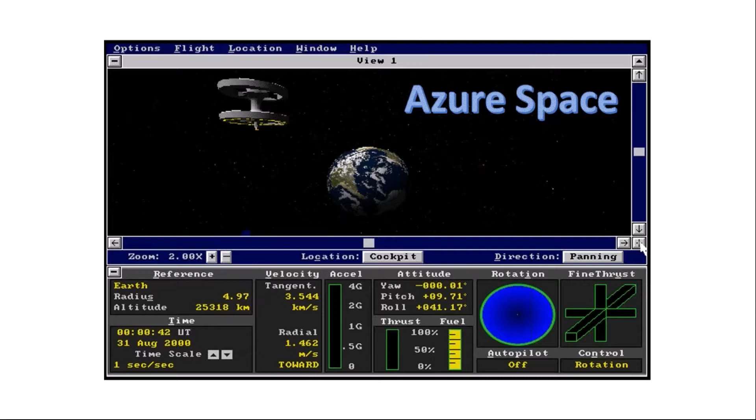We have people who are all pioneers, great billionaires, and they all invested in this industry. In fact, Microsoft has plans to launch more satellites - they already have Azure in space. Jeff Bezos was very vibrant yesterday when he came back in the capsule, and Azure Space is an example here - it's just an extension of your operating system, Microsoft, even available in space. Age is not a restriction if you have the youthfulness, whether it is 18 years on the left extreme or 82 years next to him or Jeff. It is the excitement of participating in the industry that is a dream from childhood - there is no age restriction at all.

So I now would like to use this as a few motivational things and move forward from drones to the UAV standardization in US. For a pilot certification, it is called 107 certification, and recently the Federal Aviation Administration allowed UAV even at night, and also for beyond visual line of sight testing below the G space, that is 400 feet, which doesn't require much monitoring - technically no monitoring as long as there is no untoward thing.

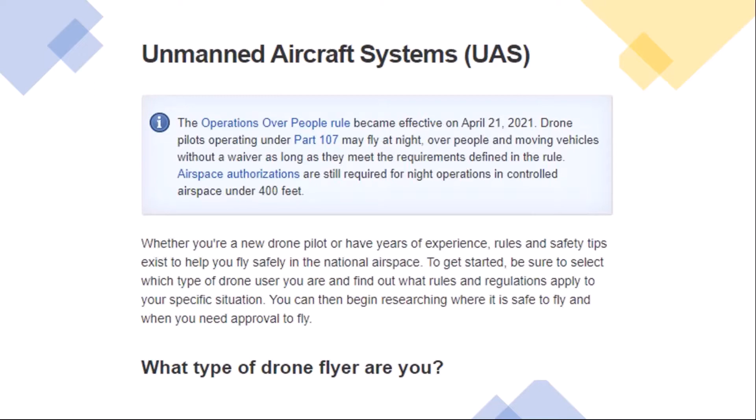These are all the things that if you are in the industry of UAV, you could, at the minimum, be in a university campus, let it be IIT Patna or Kharagpur, Kanpur or anywhere, or in public safety as a user like a government police official. You can monitor the streets or the environment, or be a certified remote pilot for a commercial operation, something like regular small planes, or for the drone for beyond visual line of sight, or a model flight, which is not a real commercial one.

Now, when it comes to UAV, it is more than your skills. It is how your device performs, that is, in the context of product testing and certification, what we are discussing today. It is the ability of your chips. Qualcomm just made an announcement that they are going strong in robotics and in the space that we are playing, because everyone is very much interested in this space, as it is very promising.

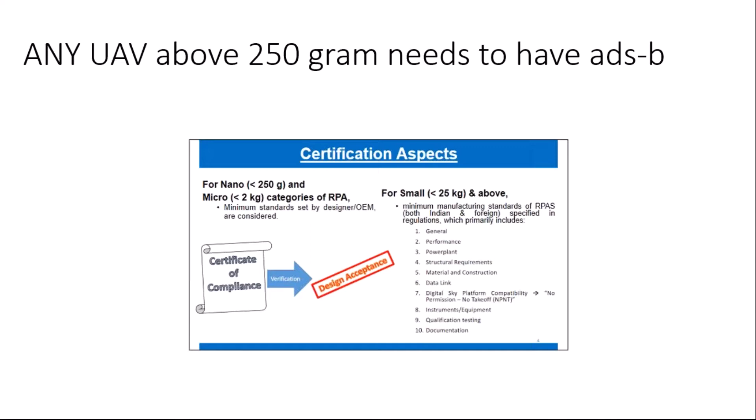Even if your drone is 250 grams, you need to be aware that you need to comply with a lot of such regulations. It's not going to be child's play. So NPNT mandate is coming. As I mentioned, there are design acceptance criteria, stage 1, 2, 3, 4, as made out in the rule book by the QCI, which I have adopted here, chapter 8, DGCA RPAS guidance manual of 2020.

So the original equipment manufacturers, be it Tata Advanced Systems or Adani's or ideaForge, which are the top 3 players in India, and of course there are Throttle Aerospace and others.

So for OEMs, original equipment manufacturers, chapter 6 and 7 rules will apply, and then documentation submission to the DGCA for verification and acceptance. Then you have to familiarize and do a demo of your product, get provisional acceptance, etc., and populate yourself in the digital sky so that you are ready to go.

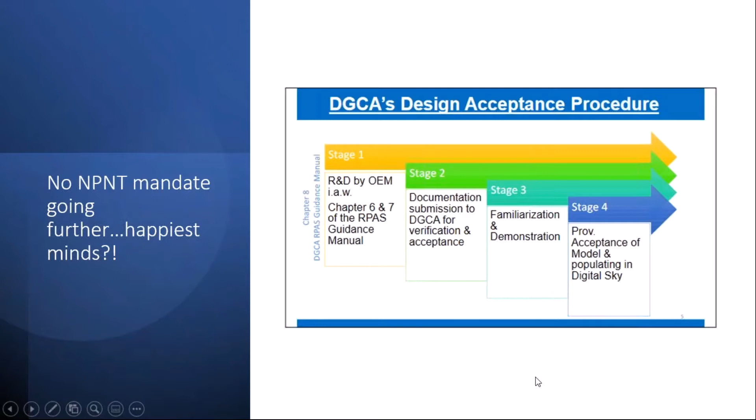That had been the case, though there would be small changes to this concept. Similarly, when this was made, QCI, about a year ago, less than a year ago, identified that there are about 19 remotely piloted aircraft system models, and most of them are quadrotors, like quadcopters.

Some are having fixed wings, some are hybrid, meaning they can perform both roles, and hexarotors, and there are other variants you could see in the visual, the small ones. So there are certain areas where, if you have investment interest, you can certainly play a role. For example, nobody has apparently come forward with their large variant. It doesn't mean they are not working on it.

And all the companies which have stakes in the aviation industry, right from Boeing, Airbus, they all have this. In fact, BMW has made a flying car demonstration. And it would not be science fiction if your car will tell you, take me to the nearest playground and I will fly because the road is congested.

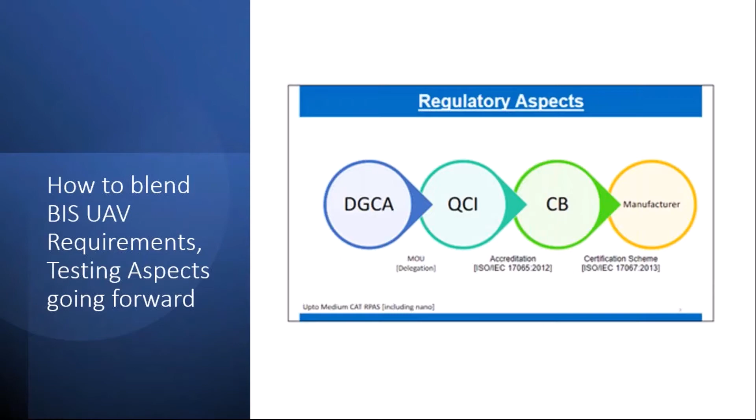Now, basically, what we learned during our journey in the Bureau of Indian Standards, Dr. Abhishek, who would speak soon after me, is also one of our contributors. And the thing is that to mentor the manufacturers is not so easy because they are already matured, and what they expect is a minimum viable order quantity, like how DJI of China luckily got a few millions at once from government to underwrite their cost, but that scenario is not there here.

So it's not like academic. A lot of hand holding is required for the BIS and other specifications to sink into their minds, to get to the level of perfection required for a global market.

So basically, the existing philosophy assumes that you get a certificate of compliance from the manufacturer, like a self-certificate, add it with the certificate issued by the certification body and the QCI, and go to DGCA and then register yourself in the digital sky and fly. So there would be a few qualitative changes as we expect in this scheme, and it is going to be more robust, but not to be scared, because we need to make it very safe.

As you can see, we are talking about the lives of people. Even if it doesn't carry humans, when it falls on humans, it has to not cause any accident. It should never fall on any human.

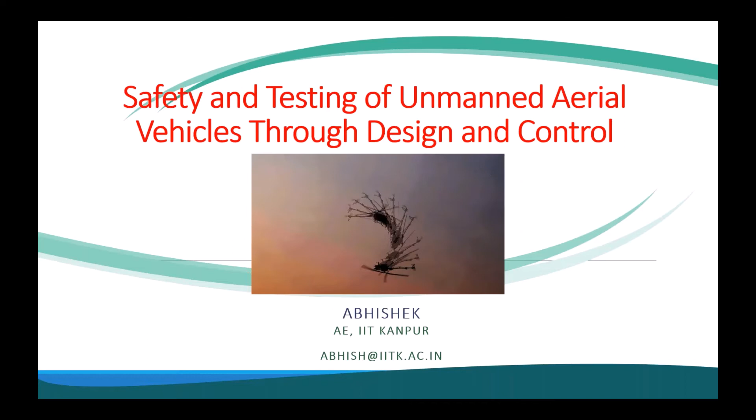Now, I'm not really an expert on standards and compliances, but as an engineer, we have been trained to understand compliances and the need for them, and to integrate them into the design process itself, so that when the design gets ready, it is already meeting some of the compliances, and the job is sort of half done already.

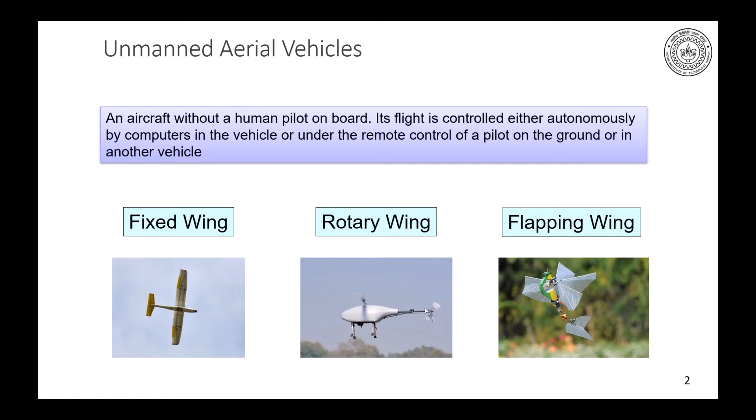So I thought I'll just put up this slide to give an overview of how different unmanned aerial vehicles look and how different they could be. Broadly speaking, from the perspective of aerospace engineering, we classify them into three categories: fixed wing, rotary wing, and flapping wing kind. Flapping wing is bird-like, which you don't see that commonly, but it is also being researched and would eventually see the light of day in the market. Other designs could be either airplane kind or helicopter kind, be it a quad rotor, multi-rotor, or whatever.

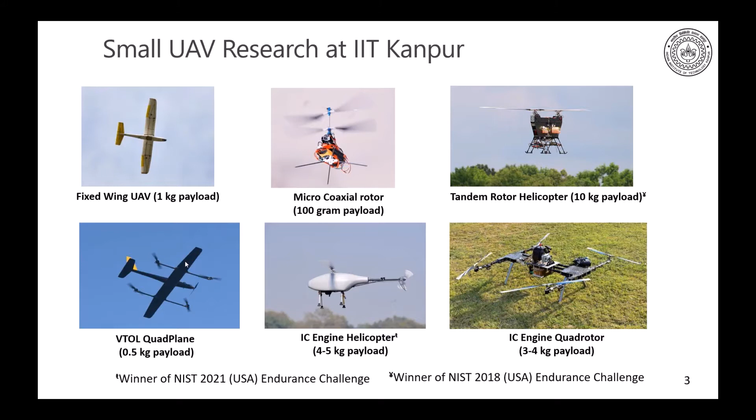To give further elaboration on how different these designs could be: fixed wing could be like a normal, simple airplane, but when you come to rotary wing design, there is a lot of variation, and a lot of hybrid designs. In rotary wing, there are designs with rotors stacked on top of each other, rotors side by side, front and back, multiple rotors, single rotor conventional helicopter design, and then wings and rotors together. This is what we call a hybrid quad plane, having a quad rotor added to an airplane.

Beyond this, there are even more unique and innovative designs coming up. Here are some pictures of unique and novel designs developed at IIT Kanpur. This is one biplane tail-sitter design, which looks like a normal drone on the ground, but it also has additional wings, and when it takes off, it actually turns by 90 degrees to become an airplane. Another variant is a swiveling biplane tail-sitter design, where you don't even require any fixed wing control surfaces, and it is purely controlled using the 4 propellers.

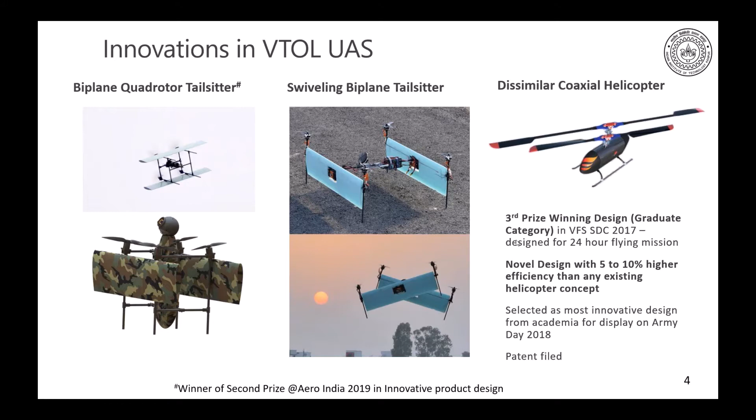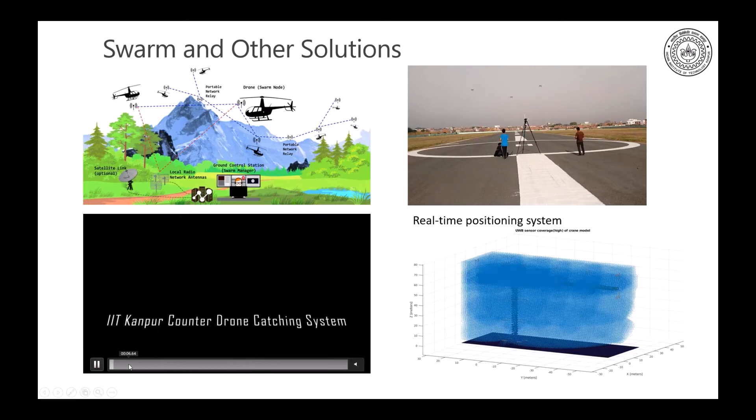And then there could be other designs also, like Kishore sir pointed out, there is already a need for counter-UAV solutions. One of the possible counter-UAV solutions is to use an unmanned vehicle to capture a rogue drone. So drones themselves may actually be part of the whole counter-UAV system. There could be another application for that.

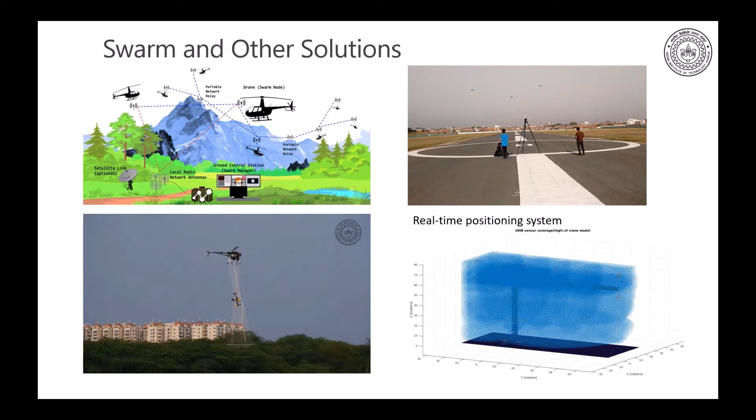And then there is a huge talk about swarm of drones. Now there is worry about the compliance of a single individual vehicle or unit of one kind, but when they start operating together in a collaborative, interactive manner, the set of requirements and compliances this kind of system would have to meet may have to be redefined, because this is a very new paradigm. These kinds of systems do not exist for conventional fixed-wing aerial vehicles. You don't see fixed-wing UAVs operating in swarms.

They may operate in a fleet, where there is human intervention, so the communication and collaboration happens at that particular level. But when it is being done autonomously, with multiple agents flying through that need to communicate, collaborate, and achieve a task together, it brings forth a completely new set of challenges.

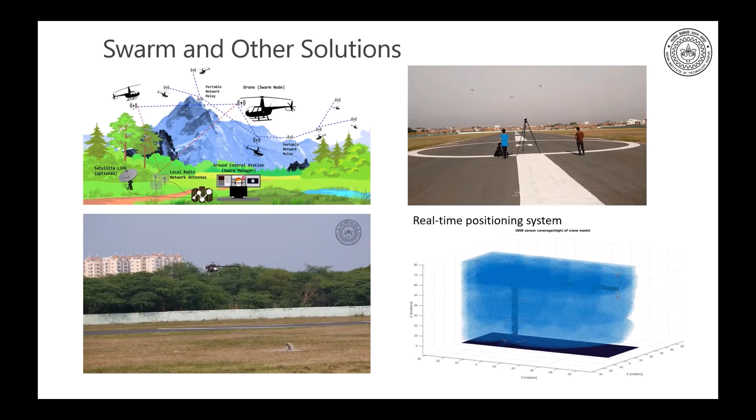So the overview is that I've already talked about some brief background. I'll talk quickly on standards and compliances, why they are needed, and how we can ensure meeting some of them and also ensure the safety of UAVs. Finally, one of the key reasons why we need compliance and standards is to ensure that my UAV operates safely during its entire operational life. So I'll talk about safety of UAVs through design and also through enhanced control.

Of course, I don't have to educate the audience about the need for standards and compliances, but nevertheless I will put it here. Special technical standards and minimum safety standards have been established and implemented for aerial vehicles to ensure their safety during entire operating life.

At the end of the day, our goal is to maximize operational availability, which one can define as 1 minus flight hours per day multiplied with mean time to repair plus administrative downtime, divided by 24 hours into mean time between failures. So our goal is to see how I can ensure that my system is available for my use round the clock.

Meeting certain compliances would allow me to reduce the mean time to repair. If I have designed my system well and it actually meets the compliances in the correct manner, it would have lesser number of failures, lesser period required for repairs, and there will be smaller downtime overall.

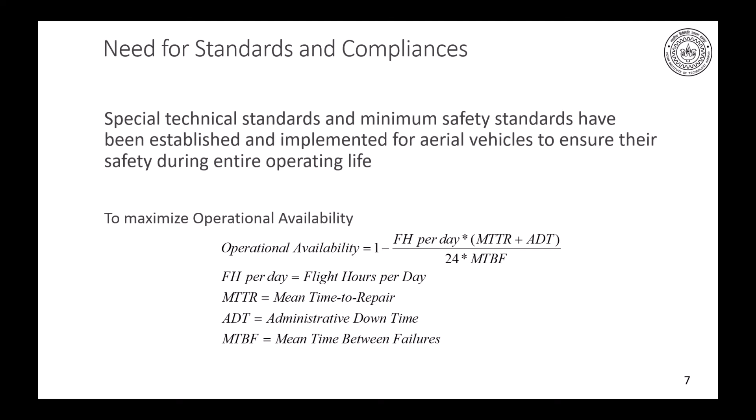Now what makes the whole problem very complicated is that a UAV is actually made up of multiple different components, so it's a system of systems. Broadly speaking, I can qualify it into 3 categories: structural systems, propulsion systems, and avionic systems. In structural systems, we have wing, rotors, propellers, the fuselage, support structure. There could be a transmission system, etc.

Propulsion system is your engines, motors, batteries, fuel, etc. And avionic system could be communication system and autonomy system, because autonomy is actually a very critical aspect for an unmanned aerial vehicle, since you don't want the vehicle to be piloted all the time. As a matter of fact, right now, beyond planning the flight plan, the human intervention required to operate most modern UAVs is minimal.

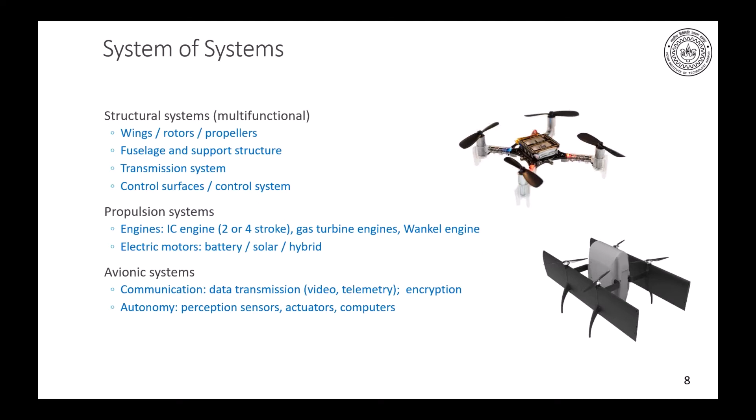So that's where perception sensors, actuators, and onboard computers become very important. And for all of these, we need to set standards for each of these components and subsystems to ensure that they are safe to operate and reliable. So setting up standards and compliances for UAVs becomes a challenging task.

So here what I've done is I borrowed information from the standards for manned airplanes, FAR 23.305. This particular standard requires meeting the fundamental strength and deformation requirements. An aerial vehicle is always focused on being as light as possible, unlike automobiles or other ground-based systems where weight may not be the biggest concern, so I can have some liberty to add additional weight. But for an aerial vehicle, weight comes at a premium.

So each and every gram of additional weight is going to compromise my performance significantly. So the requirement is to put enough material, just enough, to ensure that my structure supports the limit loads - that is the maximum loads I expect my aerial vehicle to meet in its operational lifetime, without detrimental permanent deformation. That is what we call the limit loads. And these deformations it undergoes should not interfere with safe operations. So under loads it will deform, but the deformation should not hinder my performance or operation.

The other aspect is that it should be able to support ultimate loads, that is limit loads multiplied by a factor, and this ultimate load should be supported without failure for at least 3 seconds. So this is the most absolute and fundamental requirement for manned aerial vehicles.

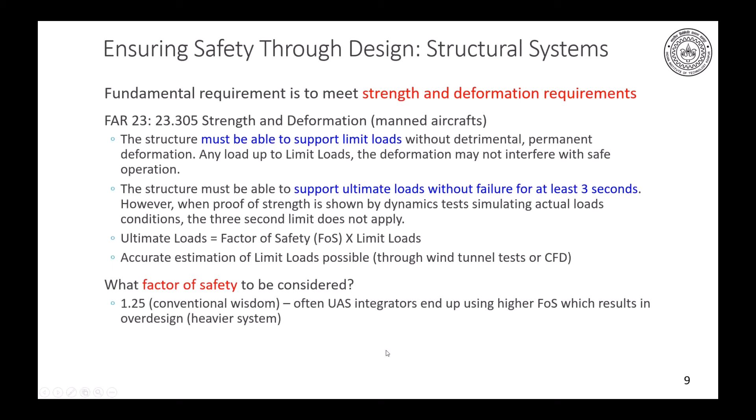Now, this design philosophy is again based on the requirements and processes followed for manned aerial vehicles. But there's no reason why we cannot follow the same for smaller scaled down aerial vehicles, which at times may look like a replica of a full scale aerial vehicle. So the two ideas which are very prominent and classical are the fail-safe approach of design and the safe life approach of design.

In safe life, I design a structure to have a minimum life. So I can design my landing gear using this approach, so that if the component fails, the whole landing gear is going to collapse. There's no redundancy built into it, and I replace my landing gear and I'm good to go.

In the fail-safe approach, what I do is design a structure which is slightly more complicated. It will have redundant support and redundant structures. So in this case, if there is a small minor failure within the structure, the remaining components would be able to take care of the extra load up to the point that the failure is detected.

So that brings forth the importance of inspection. Inspection schedules have to be defined and clearly outlined for the class of vehicle we are looking at. This becomes an integral part of the whole maintenance process, so that we can keep inspecting our platform at regular intervals and detect failure before it becomes catastrophic. This approach could be used for designing semi-monocoque wing designs or dual redundant control surfaces and so on.

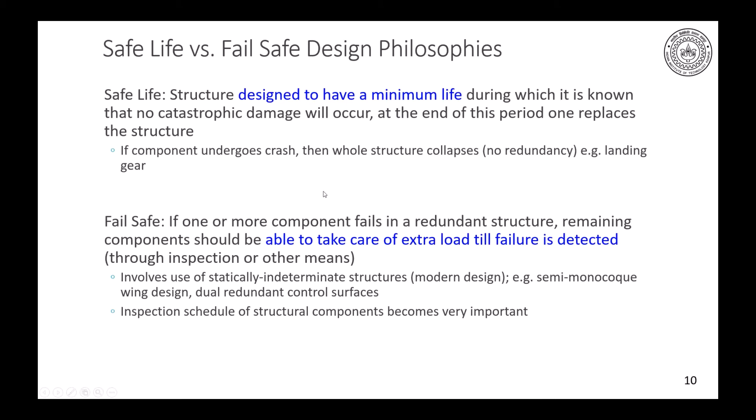So that was in terms of philosophy. Of course, one would always try to lean more towards the fail-safe design approach to ensure that my concept is safe from failure, so it is never going to fail. It has infinite life practically, but it can make the whole system expensive. So still, I would say that some components may still have to be designed using the safe life approach.

The idea is to enhance safety. So in the design process itself, we have included redundant components. That makes the whole design more reliable and safer. We have 8 pairs of them—if one fails, the other 7 may still be able to reconfigure themselves, or the controller may be able to guide them to ensure the vehicle is still controllable in a perfect manner. So that is one thing.

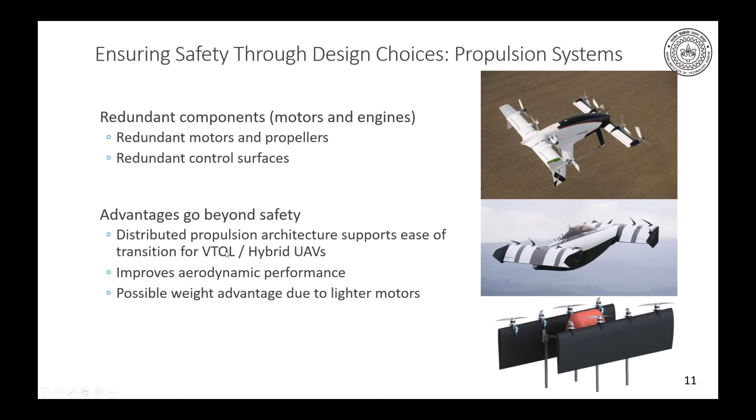We also require redundant onboard computers. Normally this was mandated for military-grade aerial vehicles, where you have duplex, triplex, or even quadruplex redundancy for onboard computers. But now, if we want to operate our UAVs in civilian areas, where it could be flying over rooftops and so on, there is a need for redundancy there too. We need to ensure that if one set of computer fails, another set can take charge of the control and ensure there is no catastrophic failure.

Actuators—the servo motors may actually have dual motors inside, so that if one motor fails, another motor takes care of the task. Redundant communication links are already getting used; this is not very hard to implement or maintain, ensuring that if one communication link fails, the other may still do the job. Nevertheless, there is always a fail-safe mode where, if the communication link fails, my UAV may return home and land. Beyond this, that's regarding the redundancy coming in on the hardware side—how I ensure my hardware is more capable with multiple layers of support.

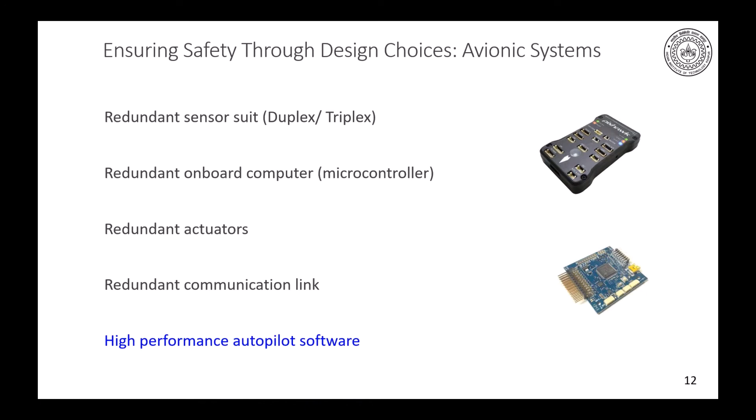But then equally critical is the software aspect, where we require high performance autopilot software, which with enhanced control algorithms can do wonders for us actually. With the same system, without any change in design, I can achieve a lot more. And how is that possible?

So let us look at the onboard autopilot software for safe operation. This autopilot already is performing a lot of roles to ensure the safety of the UAV in terms of controllability. It makes it more stable, easily controllable, and many modes are autonomously handled, so no human intervention is needed.

But then the highest form of autopilot is when you have an automatic control system, where you have full navigational autopilot, where you can achieve completely autonomous missions, with human intervention involved only for planning the mission. Auto takeoff, landing, all those things are built into that.

But now if I augment this basic full autopilot with other features such as obstacle detection and avoidance, then if I launch my vehicle, it is automatically going to detect any obstacle on the way and avoid it, preparing a new path around it and going through that.

Some of that may be obviated by using path planning and prior geofencing. So if I am aware of the complete terrain and have geo-accurate maps available, where I know each topographic feature is located, I can simply plan my trajectory beforehand, which avoids all possible obstacles.

But even then, there could be a sudden chance where some other vehicle may come on the way or some such thing can happen. So obstacle avoidance could still be relevant in that scenario.

A return to land or loiter is already an option which is available in all autopilots, which is a great feature to ensure safety. The moment your communication is gone, you don't know what your UAV is doing or where it is. So the UAV takes a safe route, tries to come back to the point where it can regain communication, or comes back home and lands, which is the safest possible bet.

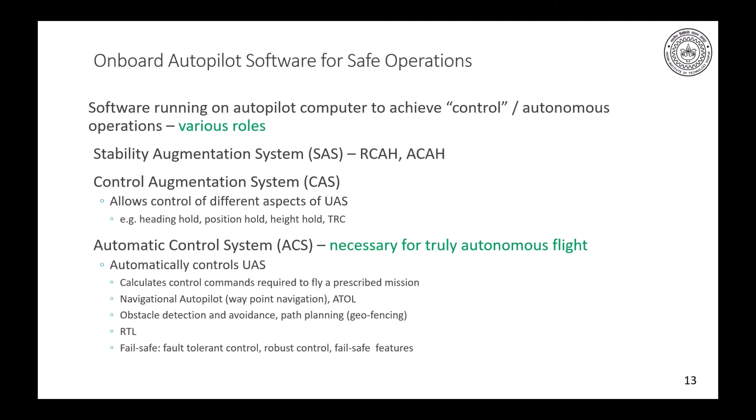And then some other fail-safe features could also be built in through the autopilot. So let me show you some quick examples of this.

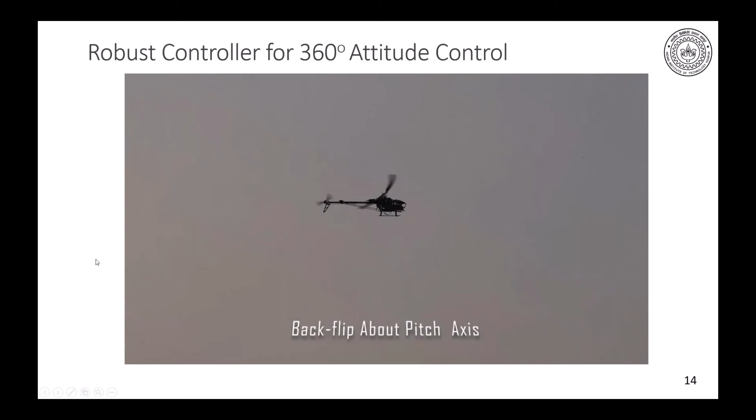In this case, you see the robust controller that we have developed at IIT Kanpur for this unmanned helicopter drone, which allows it to fly upside down, or remain controllable in any orientation. It can do a full 360 degree flip maneuver and still remain controllable. Here you saw it flipping backwards and flying as if nothing has happened.

And then it flips back again, and it's being done autonomously - there is no human involved in this. Here you see it doing the same thing about the roll axis.

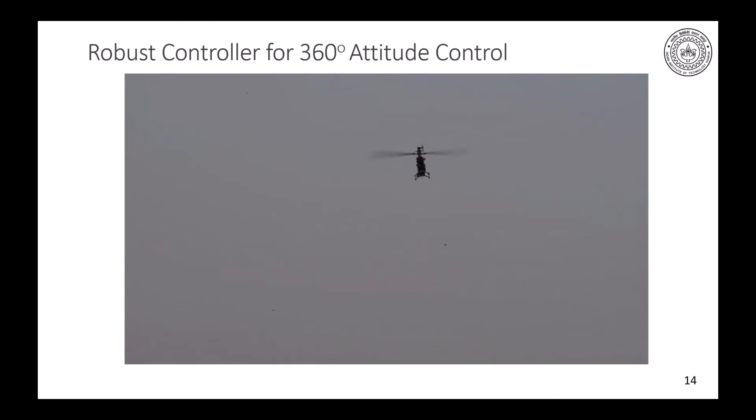In the previous case, it was doing about the pitch axis. You see it flying upside down. In the later part of the video, you will probably see it doing a barrel roll, that is, doing a full 360-degree flip, double flip.

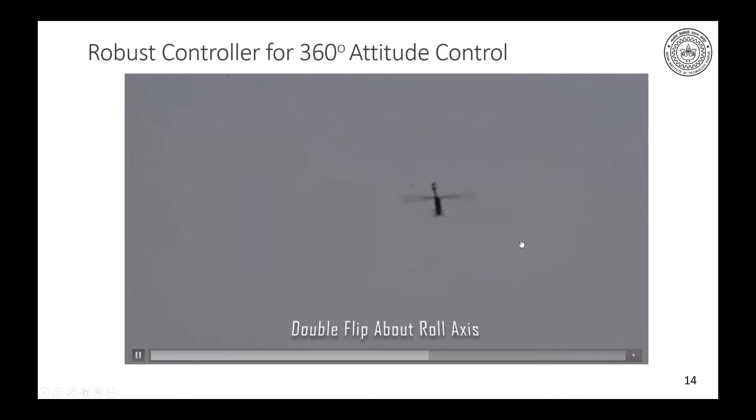So even with that kind of maneuver, it's still stable. The idea of doing this was that if a gust or wind tosses my UAV and makes it disoriented, makes it go upside down or into some other orientation, my controller should still be able to handle that and tackle that, bringing it back to the stable, normal flying orientation. And that's what we achieved in this particular research.

Here is a second aspect about the fail-safe design. A helicopter has a single rotor design, powered by an engine or motor. Now if somehow my motor dies out or my engine shuts off due to some issue, what happens to my UAV? There is nothing to ensure it can land safely. One would say attach a parachute, but attaching a parachute adds weight, which eats away my payload, already small for a small UAV.

So what we did is ensure that my UAV could perform a maneuver which all large helicopters can also do. That is called auto-rotation.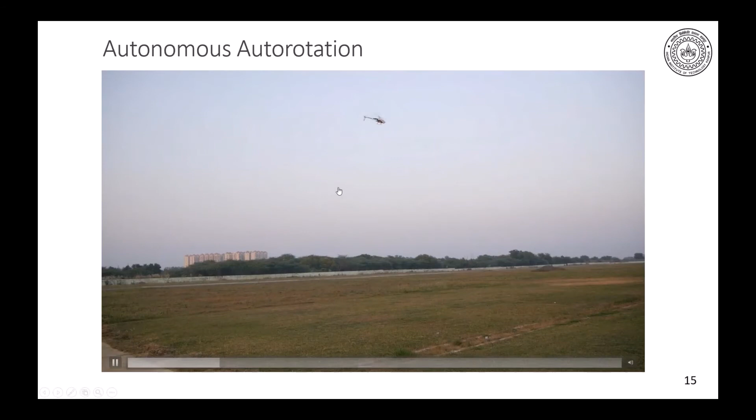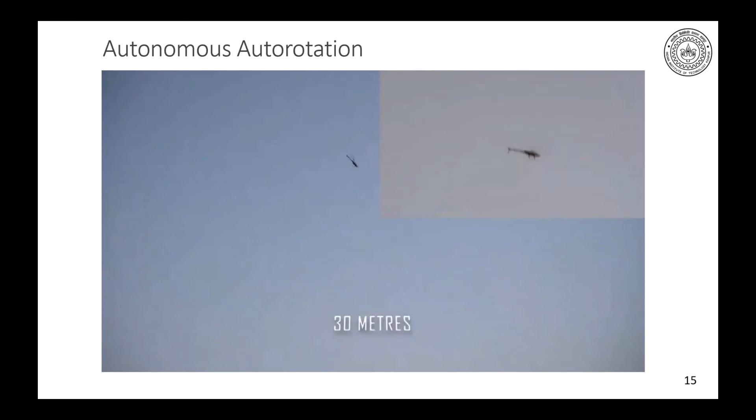So even when you saw, we manually switched off the power and the vehicle could still come down in a controlled manner and land. We did this from different heights, and every time it comes down and lands very gently, with a speed of almost 0.1 meter per second, even when coming from 60, 70, or 100 meters height.

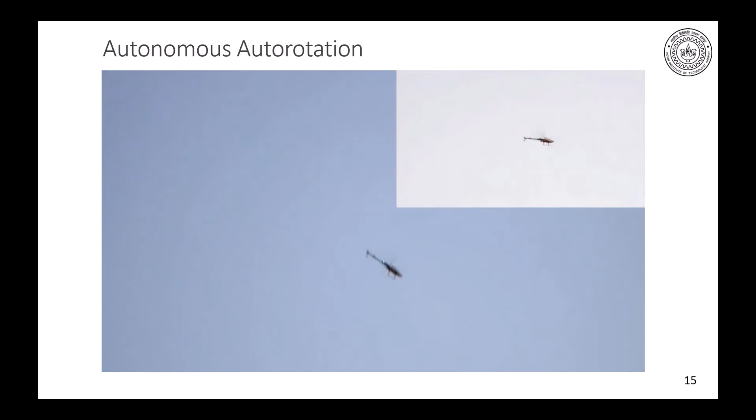So this is an example where improved control, enhanced control development, allows you to build systems which offer superior safety.

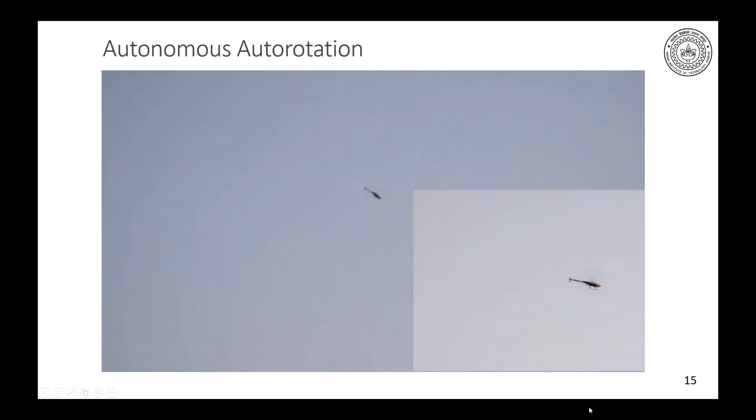Here is a demonstration from 30 meters. It performs the auto-rotation maneuver throughout, and we did this for forward flight also, not just hovering condition. Even in forward flight it can do the same thing and come down and land safely.

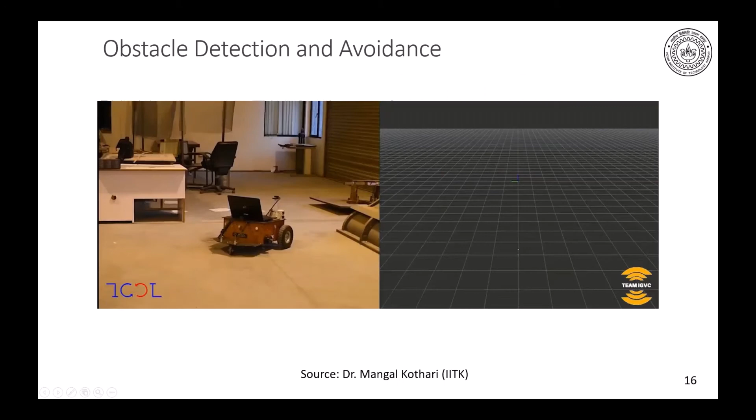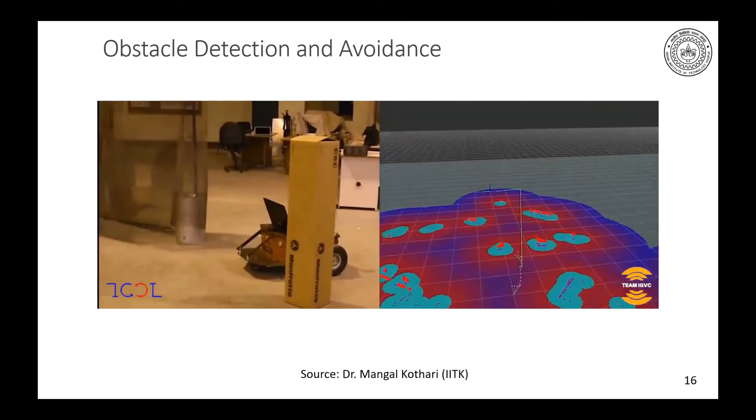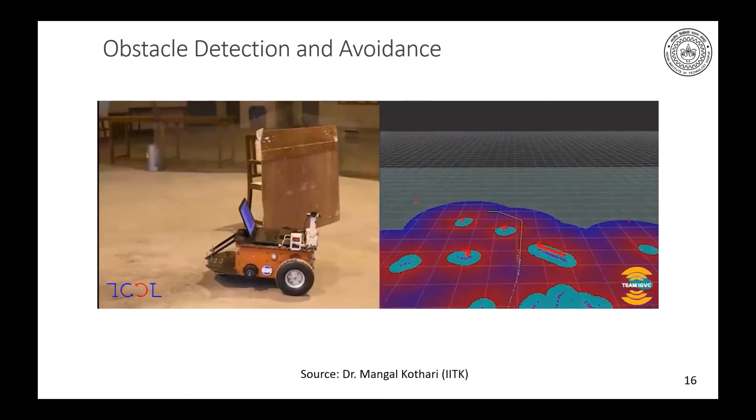Now here is a quick demonstration of obstacle detection and avoidance. This is demonstrated on a ground robot, but the same thing has been implemented on UAVs also, and used to some extent. Here you become aware of whatever obstacles are on your way using onboard sensors, and you may require multiple sensors to ensure you don't miss any obstacle on the way. This is also work done at IIT Kanpur by my colleague Dr. Kothari.

Now coming to the testing part. Of course, I don't have to tell you about testing of various subcomponents for electromagnetic interference, noise, vibration and so on, since you are already expert on that. What I am showing you here is testing of the entire UAV and the entire autopilot without actually having to fly the UAV. That is achieved through what is called a hardware-in-loop simulator.

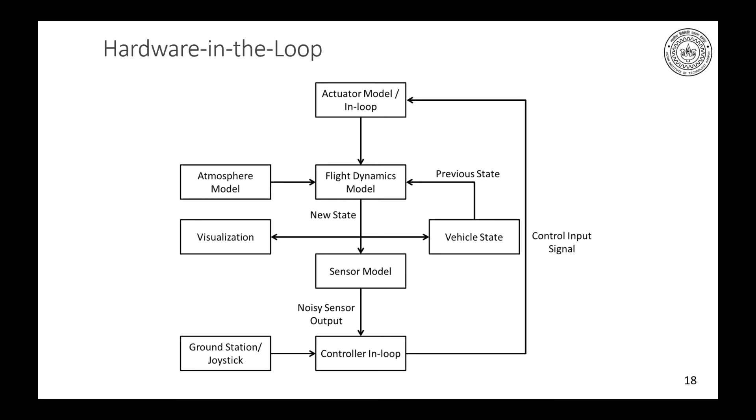This is the flow chart which tells you what this actually consists of. The most critical element is the flight dynamics model, which represents your actual physical vehicle. Other than that, everything else is fairly straightforward, with different models for sensors, actuators, and so on. Sometimes the actuator may itself be in the loop, and that's how you achieve the entire testing for the unmanned aerial vehicle in a simple manner.

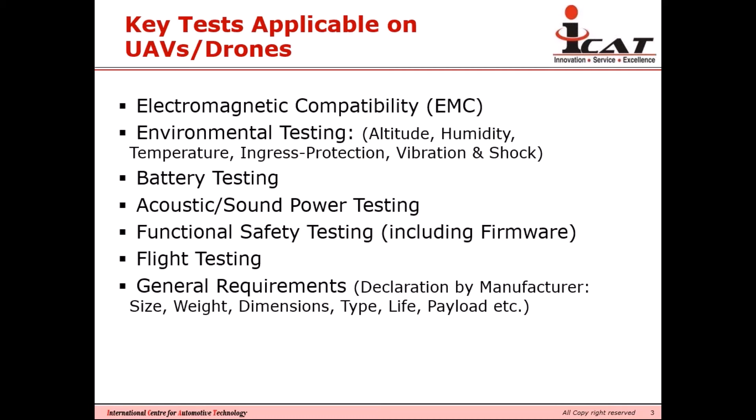Coming to the test applicability of drones, there is no specific national or international standard for testing of a drone. So DGCA and the Quality Council of India have laid down a certification scheme for RPAS, or remotely piloted aircraft systems, in India. I'll be discussing that today. Key tests applicable in this scheme are electromagnetic compatibility, also known as EMC, environmental testing, testing of the batteries used in the drone, functional safety testing, flight testing, and general requirements, which are mainly declarations by manufacturers. One test that is not part of the document is acoustic power testing, which I've also added a slide about.

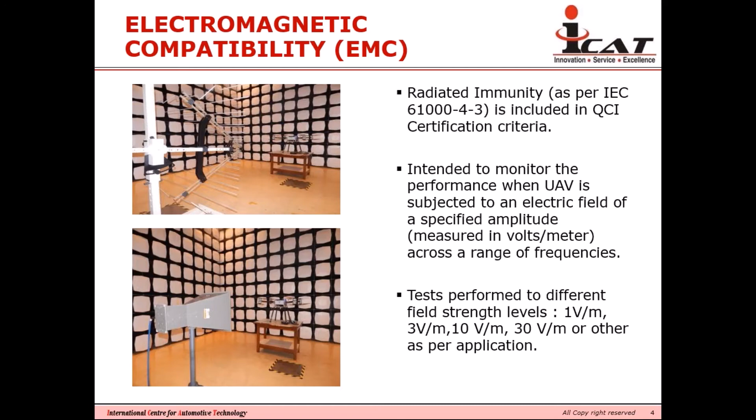Also, for military applications, MIL 461 is the standard being followed right now in India. According to this standard, for aircrafts, that is for drones, for Army, Navy, and Air Force applications, these are the tests applicable: CE 101, 102, CS 101, CS 114, 115, 116, and then radiated emission 101, 102, and radiated susceptibility, also called radiated immunity, RS 101 and 103.

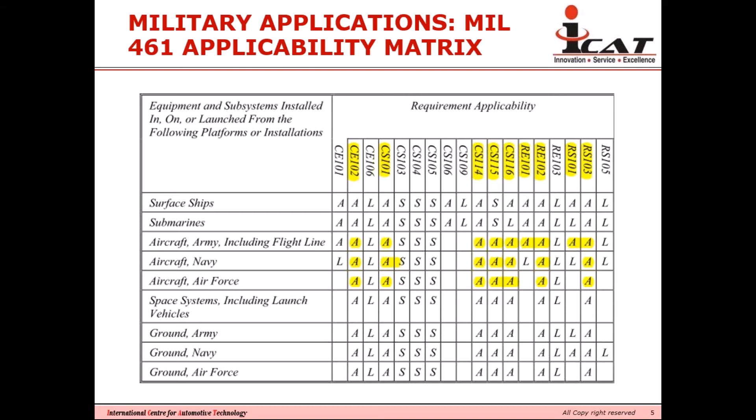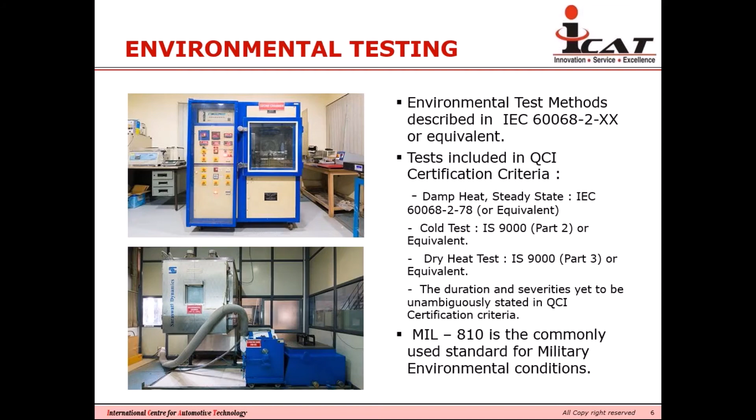In environmental testing, the QCI document talks about damp heat test, steady state test, and cold dry heat. The drone is subjected to extreme weather conditions found in India, and the standard being followed is IEC 60068-2 series. Military standard 810 is used for military environmental condition testing.

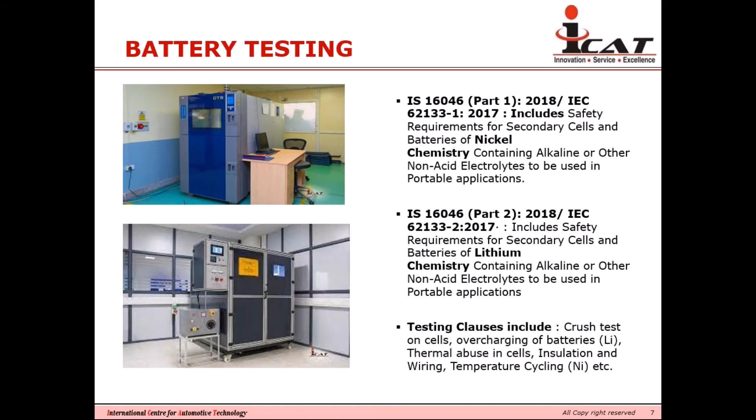Then for the batteries, the QCI document talks about IS 16046 Part 1 and Part 2, and IEC 62133. According to the type of batteries being used, the specific standard is followed. Tests included in this document are crush test on cells, overcharging of batteries, thermal abuse, insulation and wiring tests, and temperature cycling. We can also do development testing of the battery for charging and discharging cycles, and many more, endurance, etc.

Now coming to noise regulations in India, this is not being followed right now, but for the European market, regulation number 945, published in 2019, is being used. According to this regulation, ISO 3744 is the standard followed for determination of A-weighted sound power level. In this, the rotors are operated at a speed corresponding to hovering of the UAV under maximum takeoff mass, and the UAV is tested with and without accessories in all possible configurations, and sound power level is measured.

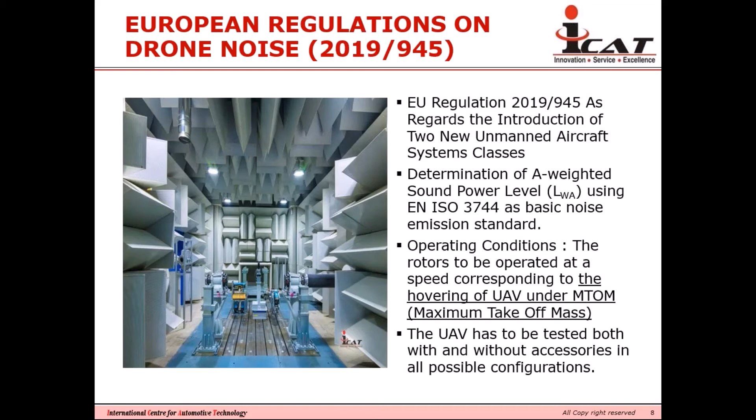This also is not referred to in the QCI at present. Some firmware level testing is mentioned, but internationally IEC 61508 is being used for such kind of applications.

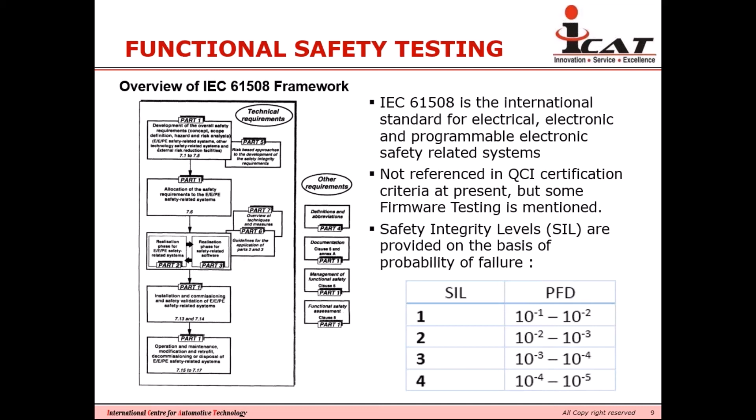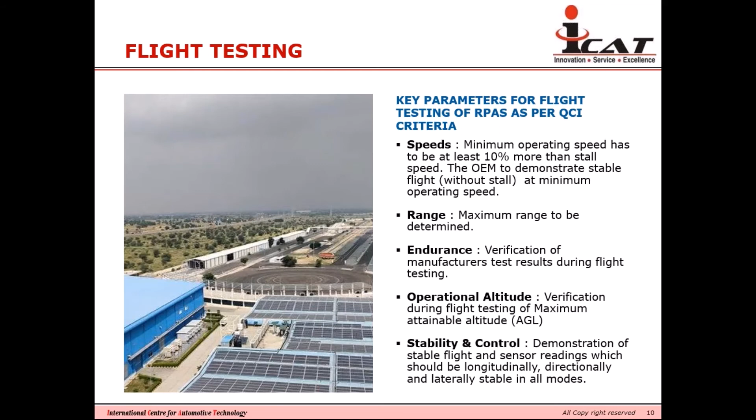ICAT has also a test track area available for such kind of testing, where there are no obstructions, and a drone can be flown up to a certain height. This is about the ICAT facilities and the testing applicable on drones. These are our contact informations, or you can always contact Mr. Venkat, who is organizing this event. Thank you, that's all from my side.

Thank you very much, ma'am, for an excellent overview of all the major testing facilities and the different tests required for UAS and drones, both according to the QCI document and international norms. Now we will go on to the question and answer session. I would kindly request the panelists to unmute themselves.

We have the first question from Mr. Anurag Shukla. One second, Mr. Anurag, you have self-muted yourself, so kindly unmute yourself. Mr. Anurag, kindly unmute yourself. Okay, I think the attendee is self-muted. Yes, go on, kindly introduce yourself and your company and product, and please specify the question and which panelist you want to answer it.